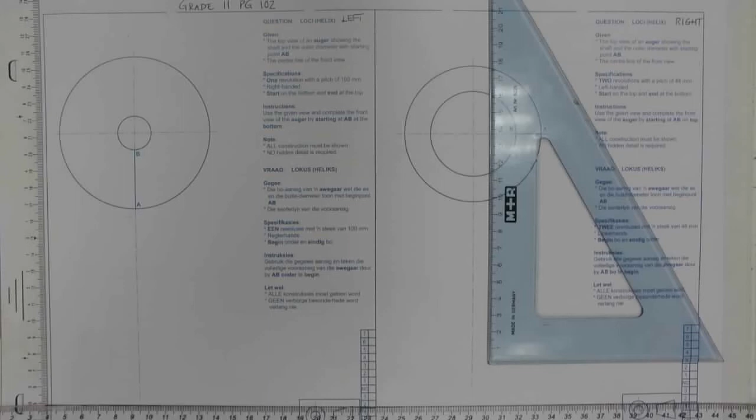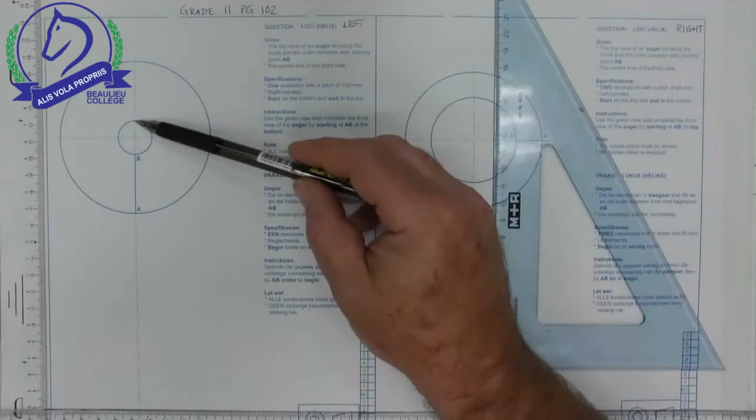They're showing us an auger. An auger is a little bit like a drill bit where they've got a center shaft and then they've got the parts sticking out from there.

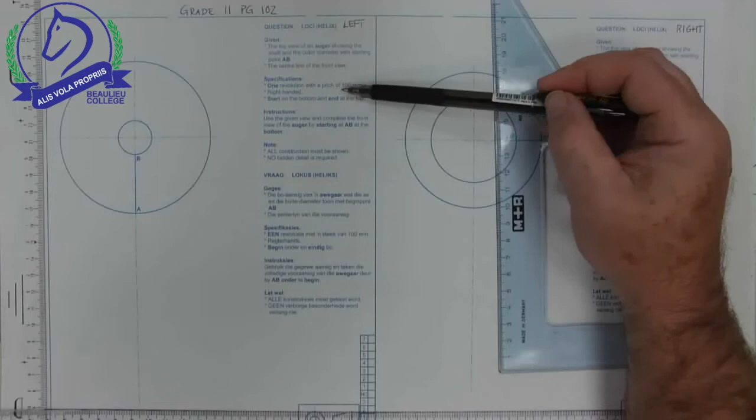At the moment we've got one revolution, the pitch is 100, so that's terrible news because 100 isn't divisible by 12. It's right-handed, so remember in that direction, if we're holding on to something in our hand, that direction there.

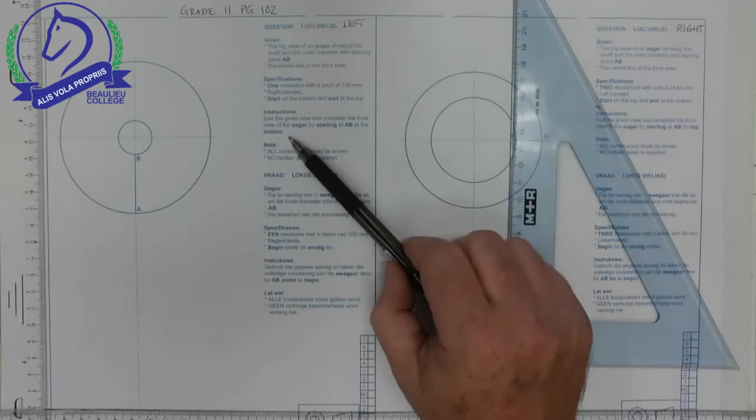Start at the bottom and end at the top of the shape. Use the given view and complete the front view of the auger by starting at AB at the bottom of the shape. So we're starting at the center of the shape but at the bottom, and then it's going to spiral up like this. All construction must be shown, no hidden detail is required.

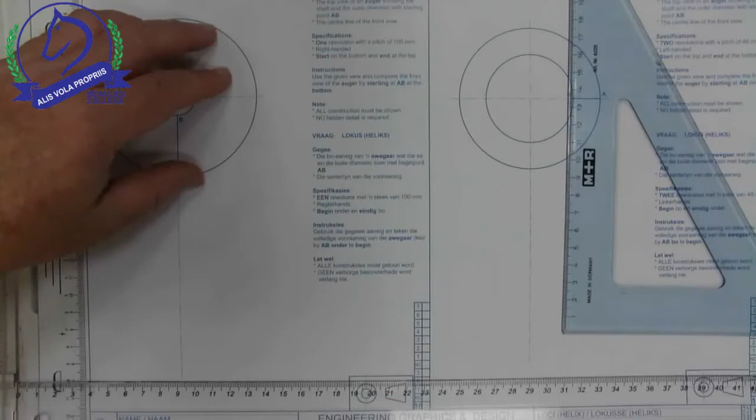If we think of the steps we want to follow, you'd want to draw the circle first, and that is the top view. That has been given to us in this situation, so we don't have to worry about that, we can move on.

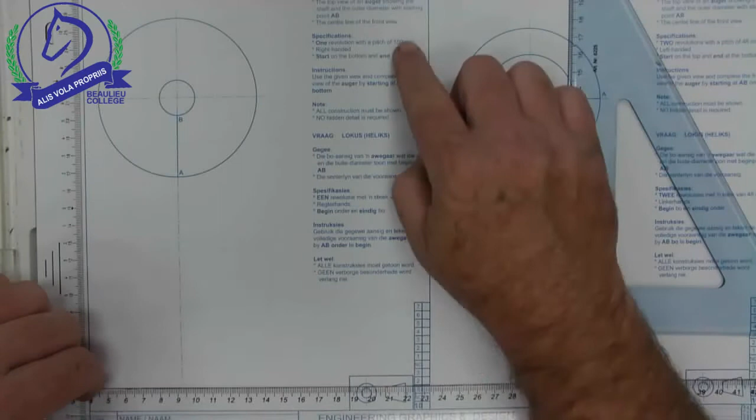Next would be to take the rectangle, which is the outlined shape of this in the front view. That's not been given, so I'm going to do that now by projecting my edges down and marking off that height which they gave us as 100.

There I've got my rectangle drawn. Now I want to do the circle. I'm going to need to divide that up into my segments, in other words my pizza slices, so I'm going to do that next. There are my pizza slices.

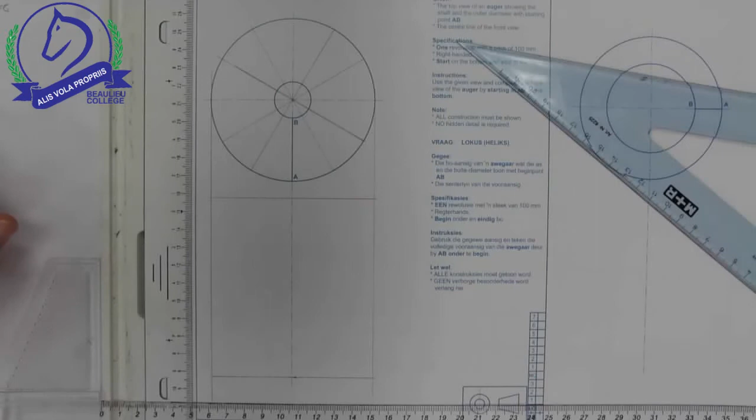Now remember, if you have to do this yourself, remember to put in your center lines because this is a circular shape. The next step that I want to follow is the height divisions.

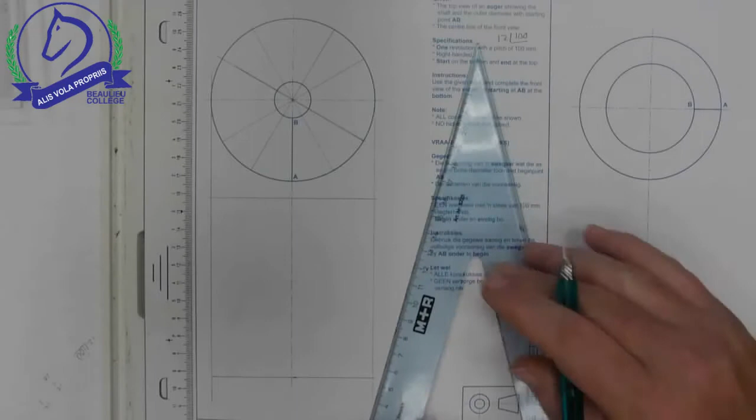Now remember, we've got to take this height of 100 and divide it by 12. It's not going to give us a round number. Because it's not going to give us a round number, we have to do the line division construction. So what I'm going to do is take a line from the bottom corner here.

I need to mark off 12 measurements, so I'm going to take that up to 120 there and mark off the 10mm divisions.

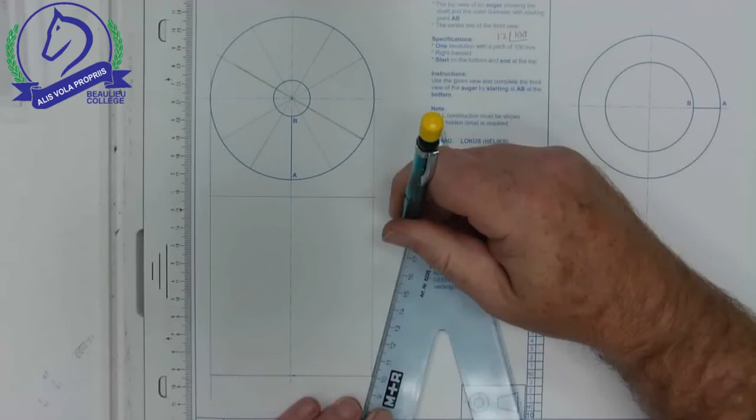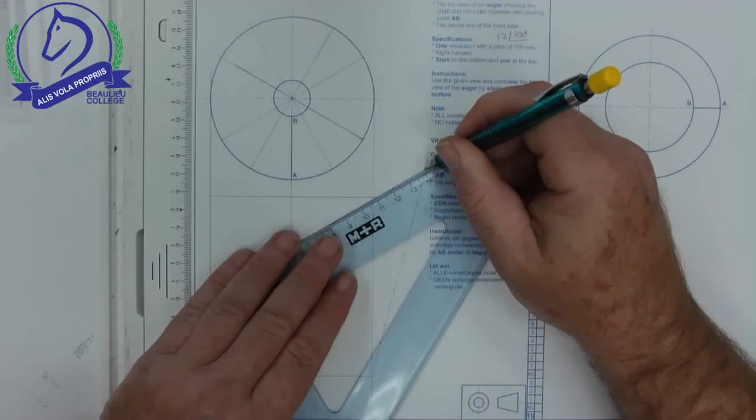Then we remember we line up our last division and join it up. Then all the other points must be parallel to that. So that was my last point.

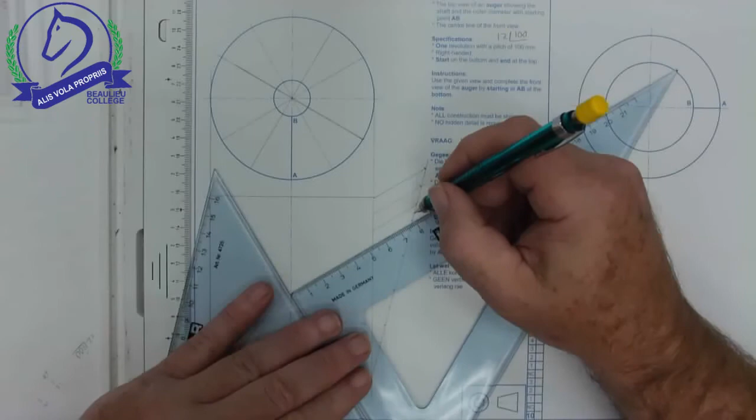Put my other set square on here. Hold it down on that now. Slide that down to my next point and project them across. I've got my height divisions here, and when I want I can project them across to where I need them.

Let's start labeling now, so this will be our next step in this process. There is 0, they've asked us to start at AB. Remember, this is a right hand thread, so if I was holding it in my hand like this, here is the right hand, meaning we'll be going in this direction.

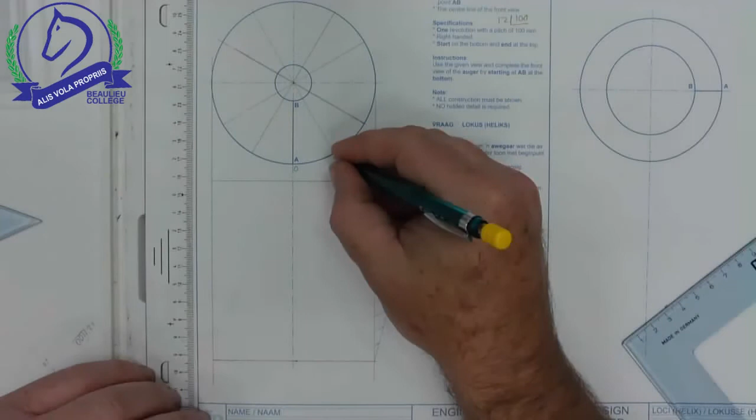So I want to label going anti-clockwise. There I've projected my different points, and if you wanted to mark them off.

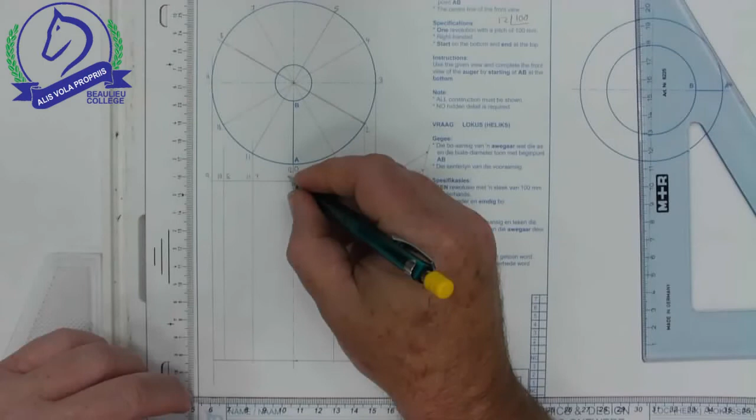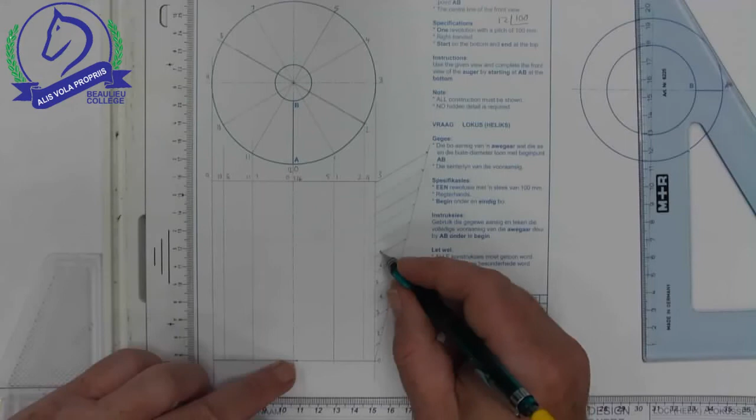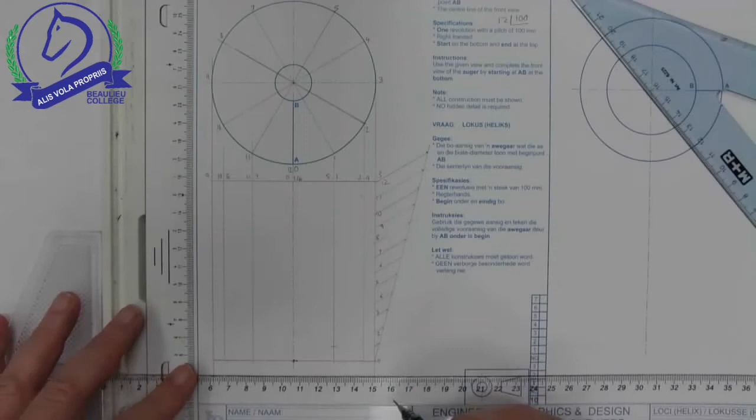We need to match up the point with our corresponding point. So here's point 0, there is point 0. Next, here is line 1, so line this up. There's 1. There's line 2, here is height 2.

Point 3, there is that point. Point 4 lines up with vertical point 4. Point 5 lines up with vertical point 5. Horizontal 6 lines up with vertical 6.

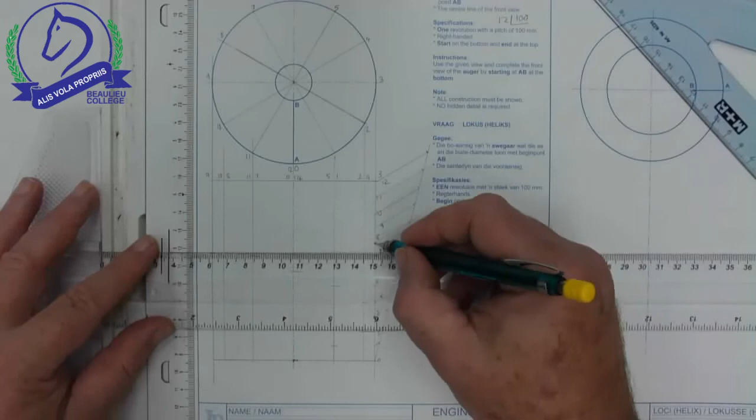7 lines up with vertical 7. Horizontal 8. 9 is on the far edge. 10, 11, and 12 has to be back at the start point, because that gives us one turn.

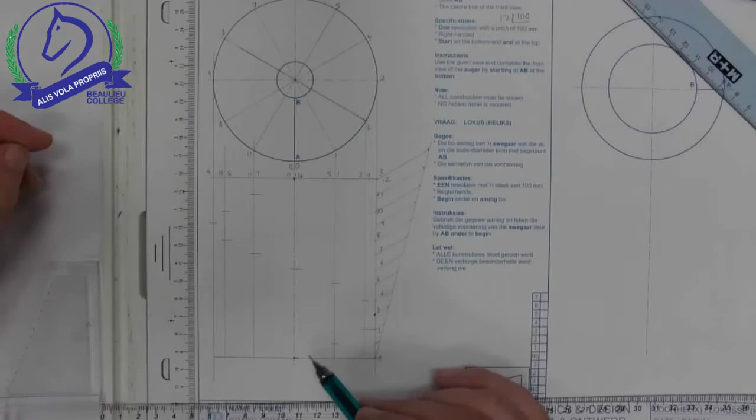Now that gives us the outside shape of this. We now have to do the inside shape on this core. Now if we go with the same numbering.

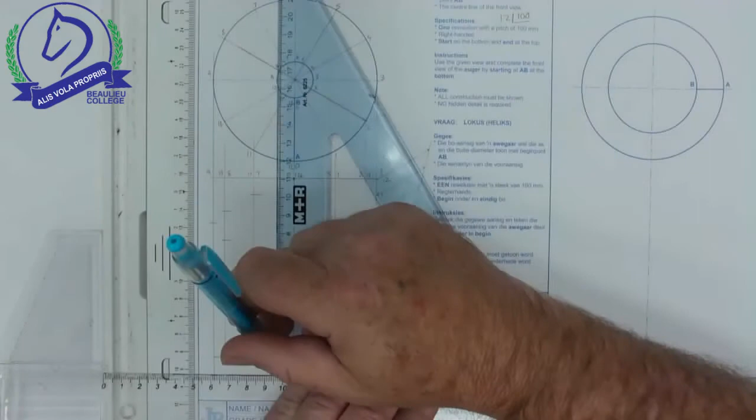I'm projecting down the heights from my inside core. Just using a different color, might not show up in your screen.

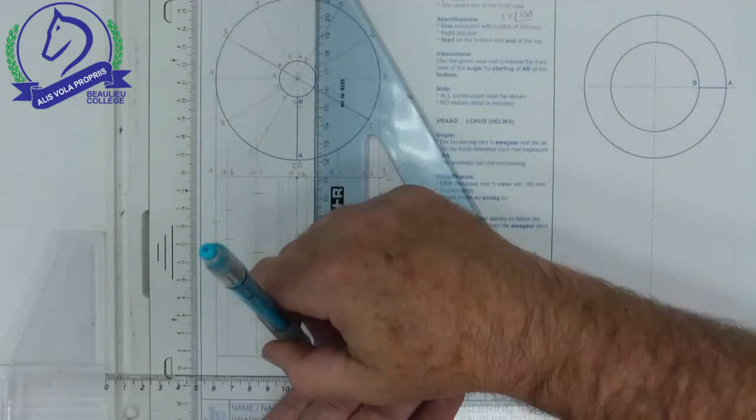This is a blue pencil, and there I'm projecting these inside lines. I'm trying to get you to understand that we can follow the same process as before.

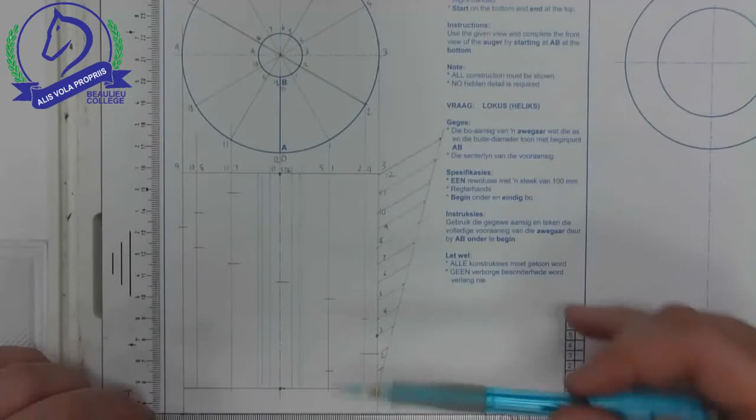So we've projected our pizza slices down. Now let's take the height. 0 lines up with 0 on the inside one.

Here is line 1 for the inside. So we take that across the height of 1 to line 1. Here's the height of 2 to line 2. The height of 3 to the outside edge.

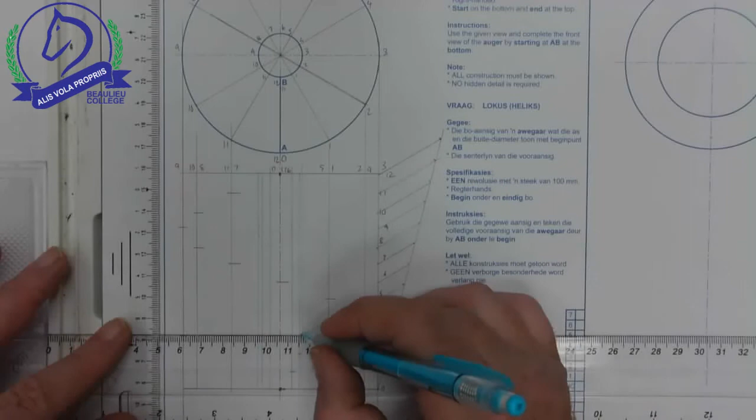This is going to go around the back of the shape, point 4, point 5, point 6 is in the center.

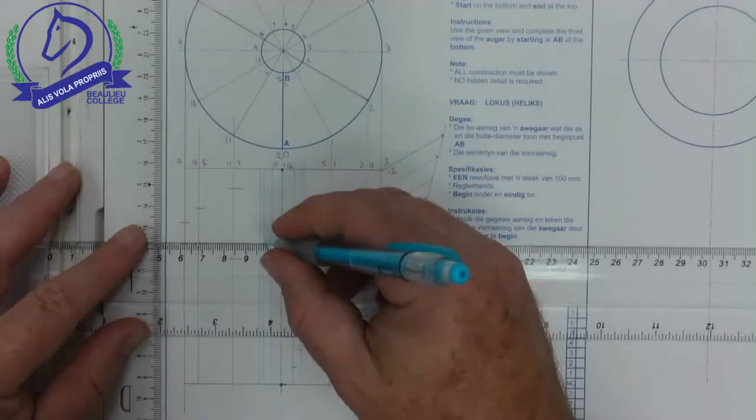7, 8, 9 is on the outside edge, 10 is coming back, 11 and 12 at the top.

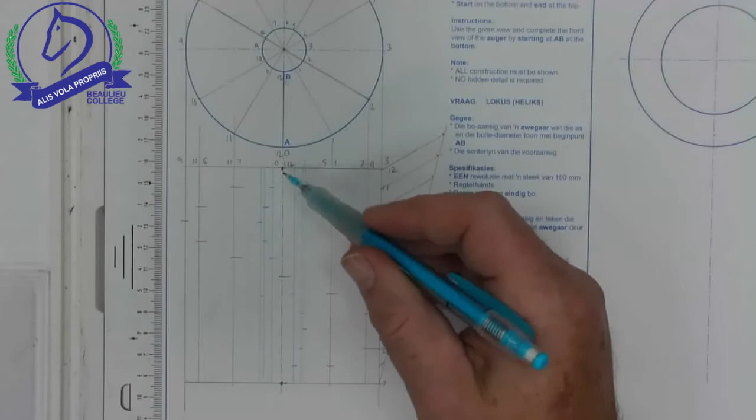So these points follow the shape of our auger on the inside on this core shape. And a lot of it we're not going to be seeing.

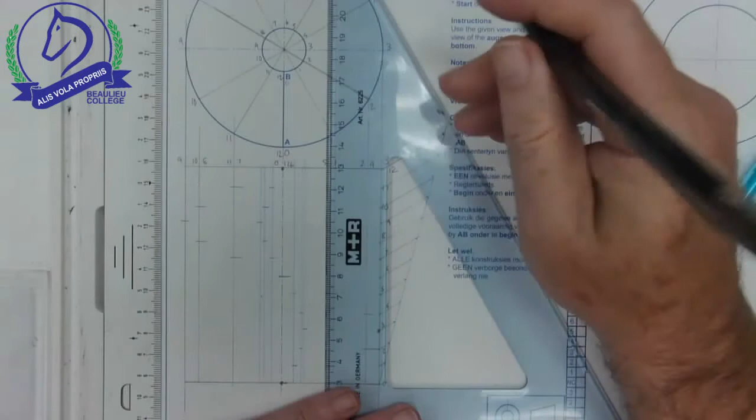I'm going to join up our points now. I'm going to start with the core. On the left hand side of the core, this is the only part that's going to be visible of the core, and so the rest of this line will be solid.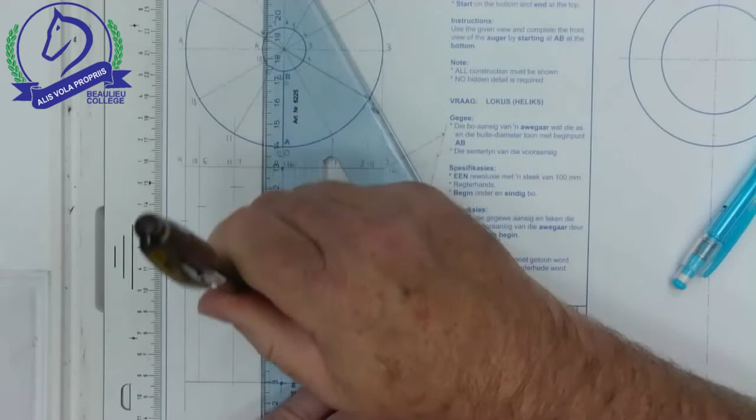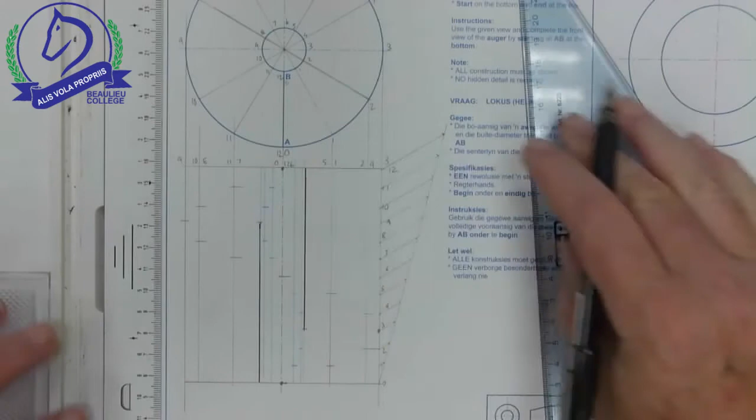Much the same on the other side. So this side is going to go down to this point. These two lines are a straight line.

Remember, that would be your test for your accuracy if it joined up to the next one. This one changes slightly, and your last one should have that little curve to it.

Same at the bottom here. Here is our little curve.

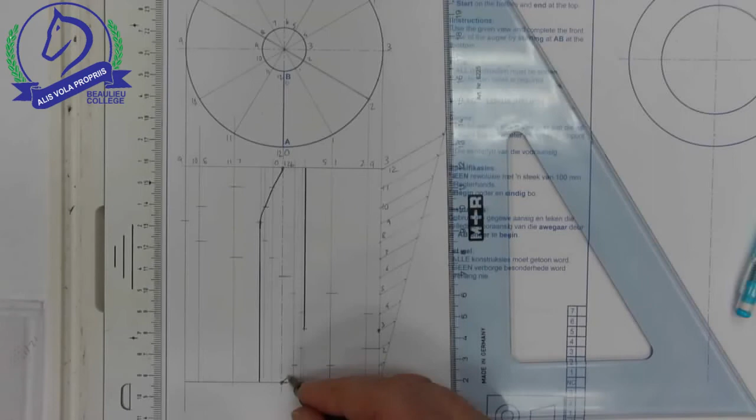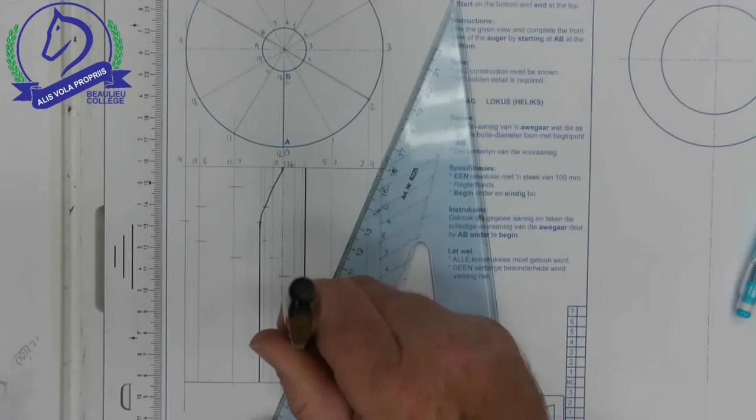That would be straight there, and just a little bit off on that one. So that is on the inside core. Let's join up our other points now.

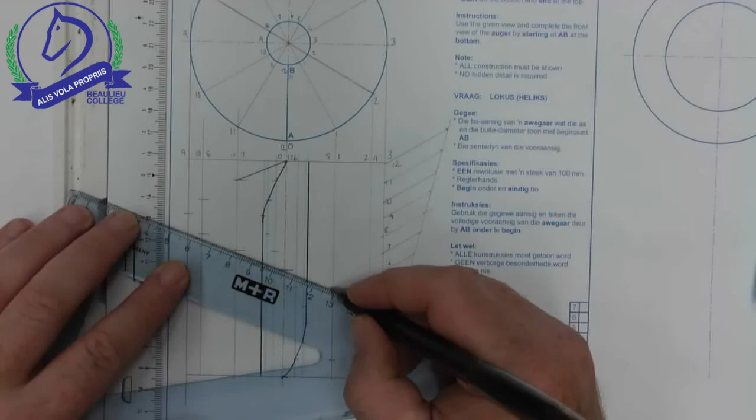Remember, these three here would be on a straight line. Obviously it's hitting not where it hits the core this time.

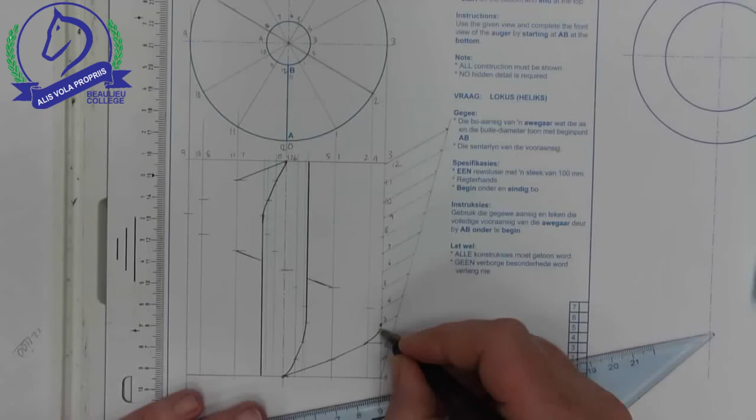And that bottom side. There's that slight change here going to this point, and get our curve for this end piece. Take it around on the curve and line it up with the other one.

Slight drop, and then let's curve this one nicely.

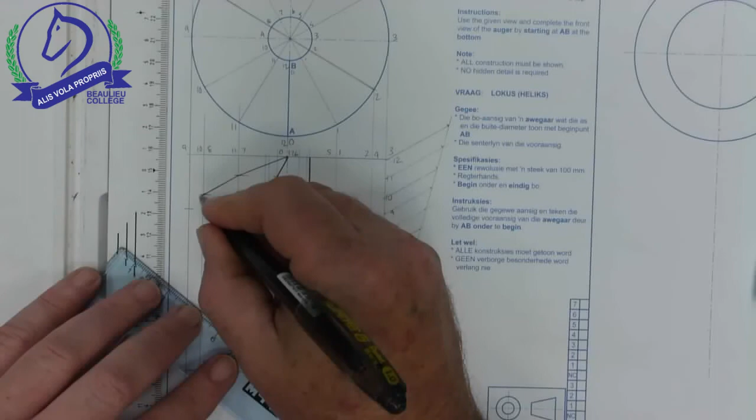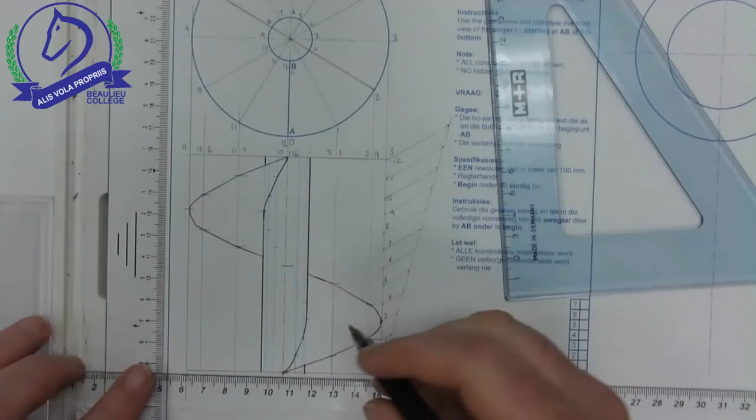Over here we're going to see a tiny little bit of the core on the outside here, and the same at the top. Let's join up the ends here, and there is your completed drawing on page 102, the left hand side of page 102.

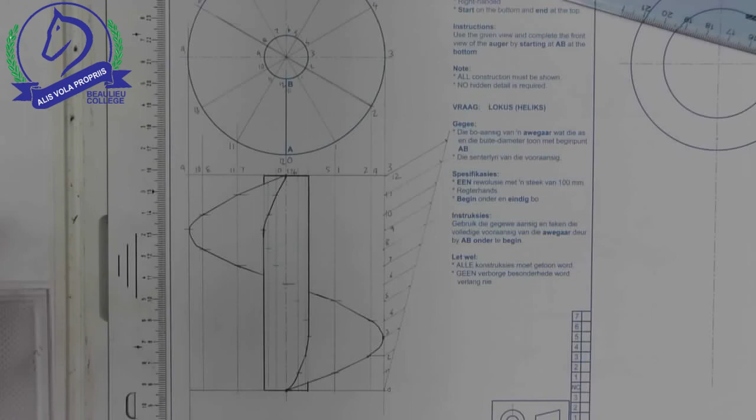Coming up next, 1 to 2, the right side.